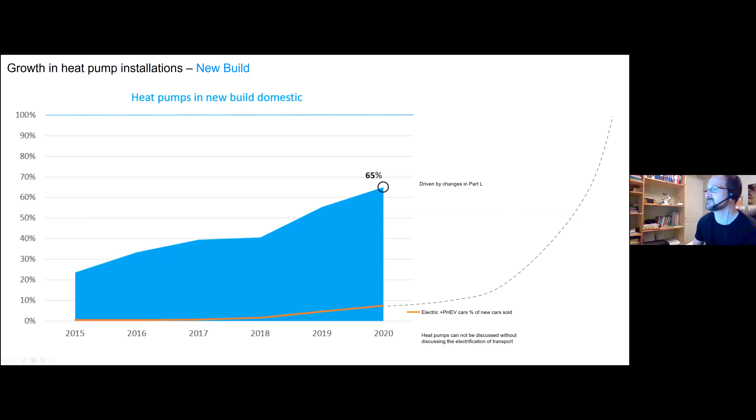So what about existing buildings? There's a relatively low growth in existing buildings so far, but the Climate Action Plan, which is recently released, aims to change all of that.

The Climate Action Plan has a target by 2030 to get 500,000 existing homes up to a B2 BER. That's about 25% of the current houses in Ireland. And 400,000 existing homes are to install heat pumps, which is a huge number - about 20% of existing homes to have heat pumps within the next 10 years. That's about 109 heat pumps a day that need to be installed.

It's a manageable number. Now the 400,000 can be a subset of the 500,000. So part of the upgrade could include a heat pump.

By 2030, the plan is to have 100% of new cars and vans as electric vehicles or plug-in hybrid. By my calculations, if we ramp up to 100% by 2030, that's about 18% of all cars. So 100% of new cars electric seems like a big figure, but in 10 years' time, you'll still only see 1 in 5 cars on the road being electric or plug-in hybrid. The Climate Action Plan works that out at about 25%, but I think they're assuming a more rapid growth earlier in the decade.

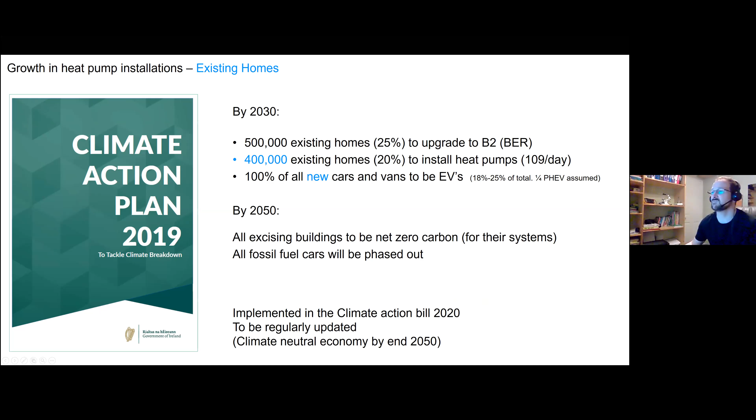So what about existing homes? Getting that 500,000 up to a B2. Now, if we take into account that over 40% of the housing stock in Ireland was constructed after 1997, it has a reasonable standard of insulation - well, some insulation. 1997 was the first serious building regulation, with U values of walls about 0.4, that sort of level.

If you take a 1997 dwelling, it will achieve roughly a C1 if you work out a BER rating. If you just add a heat pump to it, it brings it up to a B1 or maybe even an A3 in some circumstances. So all we have to do is take those 500,000 houses and add a heat pump, and it achieves that first bit of the target.

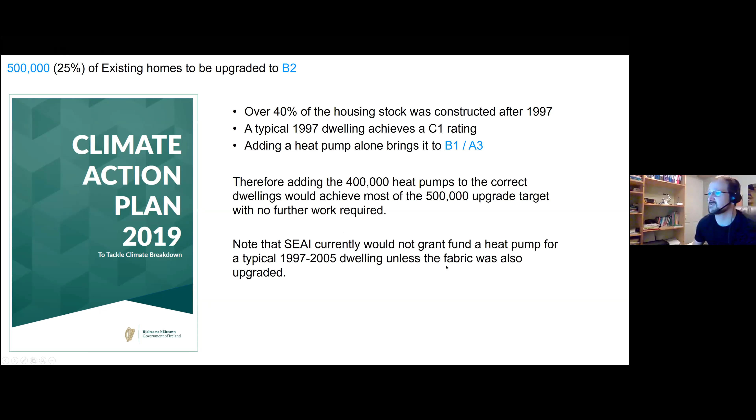Now, at the moment, SEAI won't give grant funding for a heat pump for a 1997 house unless you upgrade the insulation, at least to around the 2005 levels. Possibly that's a bad move if we want to get 400,000 heat pumps into existing houses. It may make more sense to put the money into the heat pumps rather than upgrading the dwelling. We'll get on to a bit more about that later in the presentation.

So what alternatives do we have to electric heat pumps? Why are they the chosen method of reducing the carbon of heating?

Well, we could use biomass, and biomass started off being reasonably popular once pellets started being produced. But biomass produces significant local emissions. In London, it's one of the main reasons why the levels of particulates and carbon monoxide are so high. There's also transport emissions associated with getting the fuel to the buildings, and fuel delivery is awkward, having to wait and organize fuel deliveries. So it's not necessarily ideal, particularly for buildings in built up areas, in cities. In Dublin, the particulates and NOx emissions are already above WHO limits.

Biofuel, bioethanol, elements like that - it creates local emissions and transport emissions, same as biomass. It's also quite expensive, and it's quite difficult to get your hands on it. Some companies like Tesco have done deals to secure a supply, but for the average person or average client, trying to get hold of biofuel is quite difficult. There's also some ethical concerns about it, replacing the planting of food with the planting of fuel, which can reduce the availability of food to the most vulnerable.

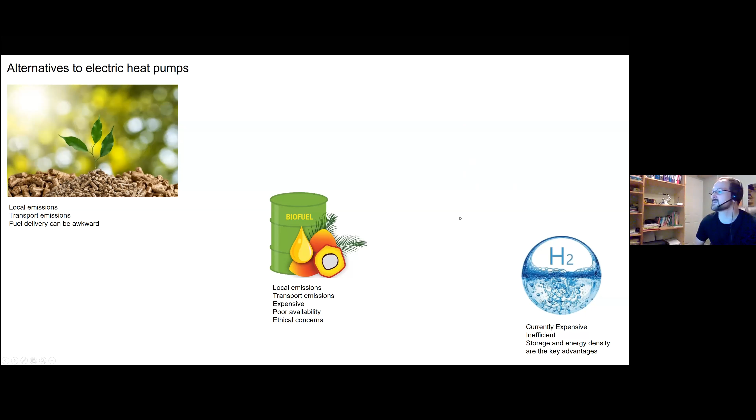However, the main interest in it is the storage potential. Unlike the wind, we can store it. And the energy density is very high, which makes it excellent for transport. So it's not going away.

Well, what about alternatives using natural gas? Natural gas isn't a zero carbon fuel, but how good can we get with it?

Gas engine CHPs, if we were to burn it in an engine, generate electricity, take the heat out, the overall CO2 emissions are actually worse than using a natural gas boiler and electricity from the grid. And of course, it creates local emissions with particulates and NOx emissions. A lot of literature will still refer to CHP as being a low carbon technology. Even if we look at the EirGrid's generation capacity statement that was released in August this year, it states that CHP reduces CO2. The maths isn't difficult to do, and if you do the maths, it doesn't reduce CO2 compared to just using a gas boiler and electricity.

Then we get on to fuel cell CHP, which has only recently become commercially available in Ireland. This is really an advanced version of a CHP unit. It's a CHP done properly. The natural gas is converted directly into electricity and heat without any moving parts. It's just chemically converted.

This process gives out about 18% less carbon dioxide than an electric heat pump when you compare it with the grid carbon intensity of electricity at the moment. So it's better, even better than a heat pump at the moment, but only for the energy produced.

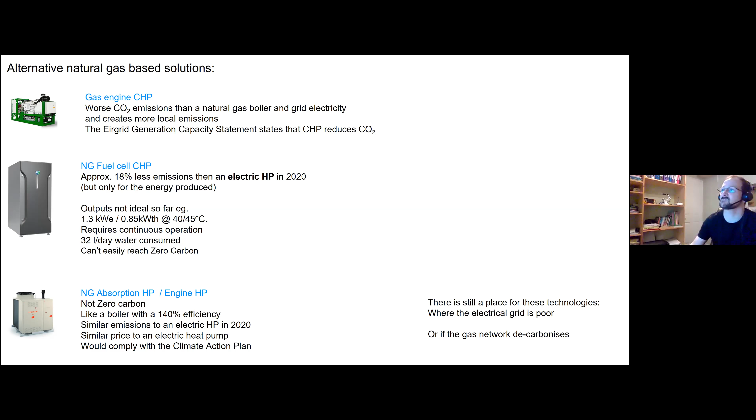They may also start to come back into popularity if the natural gas grid decarbonizes. And decarbonizing the natural gas grid is clearly something gas networks Ireland are interested in because they run the grid and that's their livelihood. Ireland has a very well-developed natural gas grid, so it would be a shame to let all that infrastructure go to waste. And there is a plan for getting the grid down to zero carbon by 2050.

So you could ask the question: does it make sense to retrofit expensive electric heat pumps when natural gas is going to decarbonize, and we can reach this zero carbon target just by holding on until the natural gas decarbonizes? The difficulty with that is that the plan is to have it decarbonized by 2050, and the plan involves having about 37% of the natural gas provided by biomethane. That's organic waste being converted into methane, which is effectively net zero carbon. About 13% hydrogen, which is useful for storing renewable energy in particular. The bit I have a difficulty with is the 50% is solved by using carbon capture and storage.

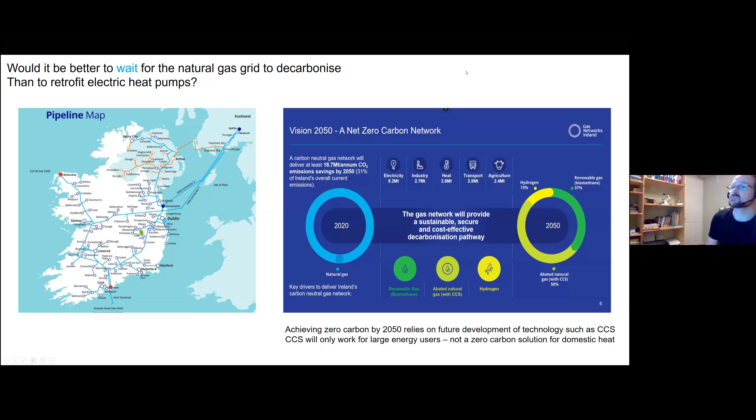So you burn the fuel, you capture the carbon, and then you bury it in the ground. That technology is expensive and is somewhat at the early stages of development. The other difficulty is it works well, or could potentially work well, for electricity generation or very large energy users, but in a domestic house it's not going to work. We can't capture the carbon at a local boiler. So for domestic users, this solution has a low probability of getting us to absolute zero carbon.

And how is decarbonizing going with the electrical grid, on the other hand? Back in around 2005, the carbon intensity of the grid was about 635 grams per kilowatt hour, and it has reduced dramatically since then, right down to about 375. The intention is eventually to go to zero by 2050.

And how realistic is that? Well, you can see that a significant proportion of the load is made up by coal and peat, and there is an active plan to phase out coal and peat by 2025, which will leave us dropping down further. Part of that will have to be made up by natural gas and part by renewables, but the figure is guaranteed to reduce. If we compare it to natural gas, that has stayed more or less steady so far.

If we look at heat pumps, even an air source heat pump used to produce domestic hot water, so water for washing at 60 degrees, it was better than a natural gas boiler from about 2016 on. And air source heat pumps for heating, from about 2008 on. You can see why 15 years ago it didn't make a lot of sense to fit heat pumps, because the carbon impact was actually larger than using a gas boiler. But right now, using a heat pump is about twice as good in terms of carbon emissions as a gas boiler. So changing to heat pumps now gives a certainty of improvements straight away.

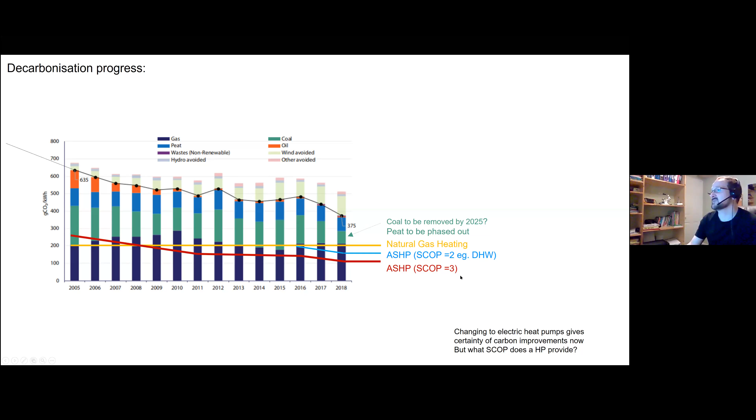So what sort of efficiencies can we get from a heat pump? If we look at the marketing of heat pumps, we get all sorts of claims. The claims have been more carefully worded in recent years. I've seen many a claim years ago of manufacturers saying you put in 1 kilowatt of electricity and you get 5 or even 6 kilowatts out. More recently, manufacturers have become more careful about how they word the claims. So here's a couple I pulled off the internet this week.

Two thirds of the usable heat comes from a free and sustainable source. Well, that could be true, I think it's a COP of about 3. That seems reasonable. Next one says up to 75%, so that would infer a COP of 4. However, they've used the word 'up to', which means it's not particularly claiming anything definitive. The next one says between 2 and 4, but in new systems can be 5, using the word 'can be' to qualify that. So they're saying somewhere between 2 and 5.

It's not really committing to anything in particular. Another one says up to 5 times the electricity, so a COP of 5 is claimed directly, although it says 'up to'. What they mean by up to is that under certain weather conditions you get a figure of 5, which isn't really that useful as a metric. You want to know how it performs over the whole year.

So if we go to SEAI instead, as an independent body, and ask what do heat pumps do, their website will say between 3 and 4. So they're giving a fairly safe range.

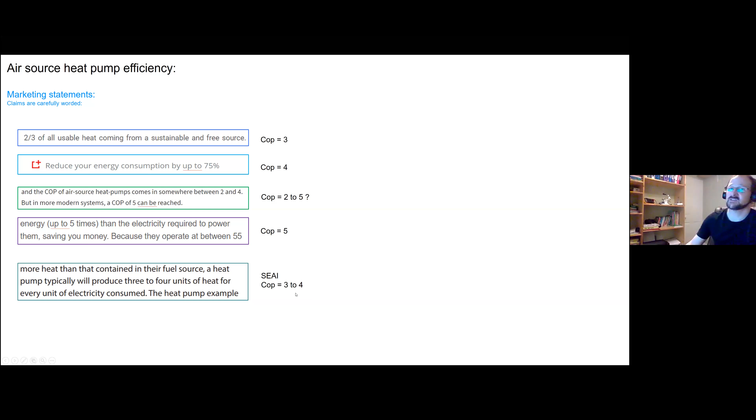There's very few studies that have monitored the actual performance of heat pumps in domestic settings seasonally, and there's two that are almost always referred to. First is the Energy Saving Trust study, where they took 80 heat pumps and monitored the performance of them. The manufacturers were aware that they were being studied, so they were able to put their best foot forward. This is the distribution of seasonal COPs.

This is a subset. After the initial test was done, the manufacturers were given the opportunity to go back and tweak the units, and then they were remeasured again. You can see none of the units achieved a figure of 3, and they're getting around 2.2. But that was back in 2012, and there's been some improvements since then. UCL did a second study in 2017 with about 700 dwellings, and they're getting a median of about 2.65 for air source and about 2.81 for ground source.

One of the interesting things is they're not really getting much of a difference in performance between air and ground source, although it's traditionally always stated that ground source gives you much better efficiency. From the monitoring systems, it doesn't seem to be true. So even these figures are much lower than that figure of 3 I was using earlier. But that's 2017 data, and products have improved a little since then. I think if you see claims of over 400% efficiency, you need to start treating them with suspicion.

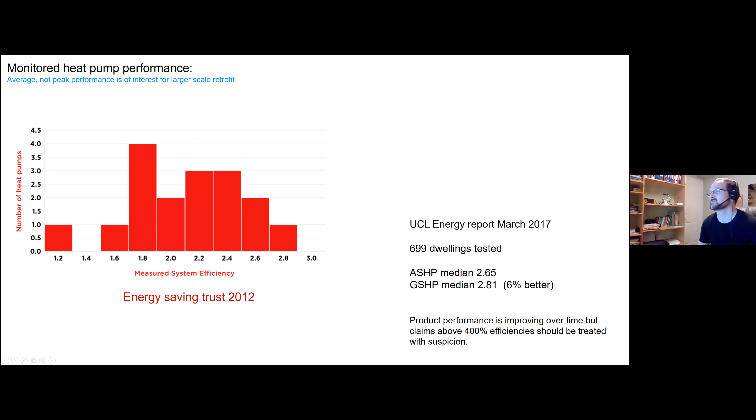The other difficulty with ground source is if it's poorly designed, it can be less efficient. I've seen a lot of ground source systems that have been undersized, and to compensate for that, the temperature is lowered. So where in an air source system, if it was 7 degrees outside, you're working with 7 degrees, with a ground source system, quite often the flow would be at -6, -8 even. That graph assumes there's a 20% difference in performance, whereas there was 6% in the monitored performance.

Here's an interesting one: the more efficient we make a building, the less efficient the heat pump becomes. So if you think of a new, very efficient fabric for a building, well built, well insulated, airtight, with heat recovery ventilation, the amount of energy used is a lot smaller, but the efficiency of the heat pump is worse. That's because the external temperatures are lower when the heat pump is required.

When it's warmer, you don't need to turn the heat pump on. So if you take a new dwelling, say below 10 degrees you need to turn the heat pump on, above 10 degrees you don't. That gives you an average temperature of about 6 degrees. In an older dwelling, anything up to 15 degrees, you need to turn your heat pump on, and the average is about 8.5. So there's a difference in temperature.

Also, the newer building will spend more of its time in defrost cycles, which accelerates the drop in efficiency.

The other factor is that a large proportion of the energy is domestic hot water, which has to be generated at 60 degrees, where the heating might be generated at 40 degrees. So that reduces the efficiency of the heat pump. In a well-insulated dwelling, the flow temperature can be reduced, but not for the domestic hot water, so the net effect is that it's less efficient.

What this is getting towards is that retrofitting heat pumps is more efficient than installing them in new dwellings, because the energy usage is larger, so you're saving more, there's more energy to save, and the heat pump efficiency is better. So if you had a fixed amount of money to spend on heat pumps and could install them in newer buildings or older buildings, you'd get a better carbon saving by installing them in the older buildings.

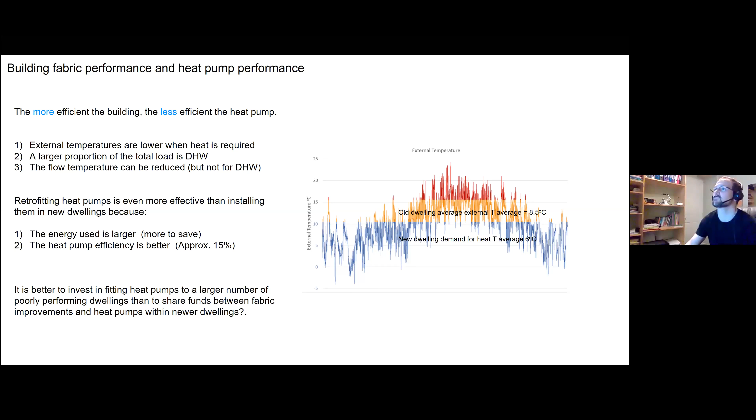This is really questioning the fabric-first mantra that is the staple of sustainable design. Another part of this question is: is it carbon and cost optimal to improve insulation in buildings if the gas and electrical grids are approaching zero carbon by 2050?

There's a carbon cost in making insulation, known as embodied energy - the energy it takes to make the insulation materials. If you take an extreme scenario like 2050, every bit of insulation you add to the building increases the carbon used, because there's no energy used in heating, but there is carbon used in producing insulation. But if we look at the current scenario instead...

I've done a graph here with the U value on the bottom, comparing mineral wool insulation and PIR insulation, which is high density insulation, against the total lifetime carbon emissions. This takes into account the embodied energy of the insulation and the heat that escapes through opaque elements - walls, roof and floor.

So when you improve the insulation value beyond 0.2, you actually increase the carbon used. By adding insulation, you're increasing the overall lifetime carbon emissions of the building. It's even more dramatic if you're using PIR, because the energy used to make PIR is considerably more than the energy used to make mineral wool. This chart takes into account the difference in density of the two materials, for an equal U value.

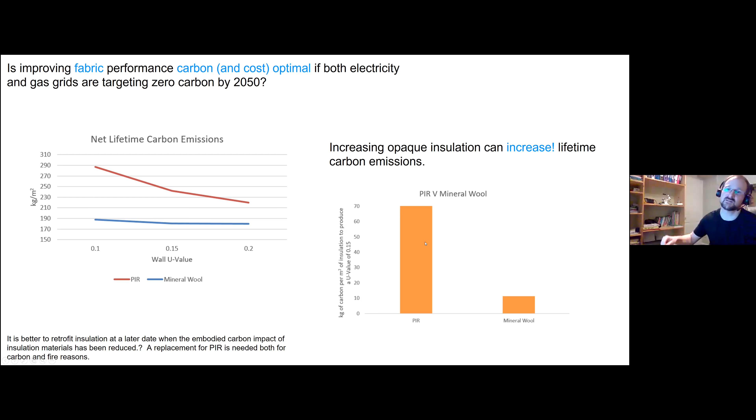So there is also an argument to be made that it may be better to retrofit insulation at a later date - to install heat pumps now and come back to install insulation later, if a better form of insulation is produced with less embodied energy. We need a replacement for PIR anyway, because there are significant fire issues with PIR in facades. There may be an alternative produced with low embodied carbon, and the carbon used to produce insulation is also reducing as the grid intensity reduces.

Even looking at the 2019 Part L, that has a U value of 0.18 for walls - that's already less than carbon optimal. So at the moment, building to the building regulations uses more carbon than if we didn't build to them. This effect increases as we approach 2050: as the carbon impact of the heating systems reduces, the effect of the materials we use increases.

Now that argument is also relevant to what you build a building out of, and concrete usage and other materials as well, but purely in terms of insulation...

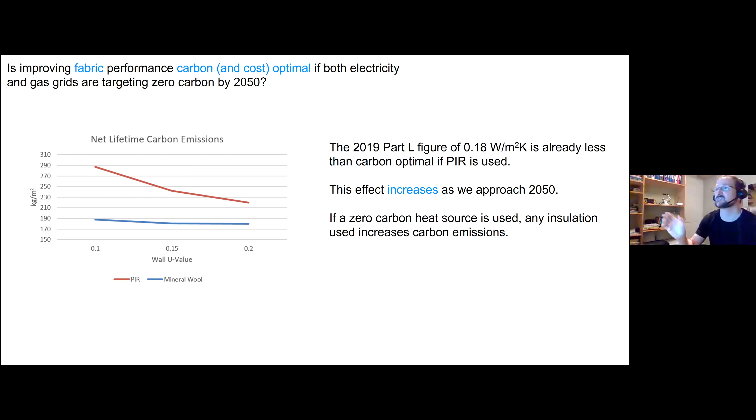So what approach should we take to retrofitting? Well, if we improve the thermal performance of the worst housing stock and prioritize in particular the pre-1997 stock - that's about 60% of the housing stock - before adding insulation to dwellings that are partly insulated.

So rather than offering grant funding for insulation for anybody who wants it, it would be better to offer it to those with the worst performing buildings and concentrate the money on those. That's where the biggest savings are to be made. Minimize grants to homes that are reasonably well insulated.

Concentrate funds on retrofitting heat pumps into dwellings that have a poor insulation level, but not too poor. I'm saying not too poor because if you put a heat pump in a very old building, it will find it difficult to heat the building because the temperatures are lower. But certainly 1997 level buildings are better to fit heat pumps into than 2005 dwellings.

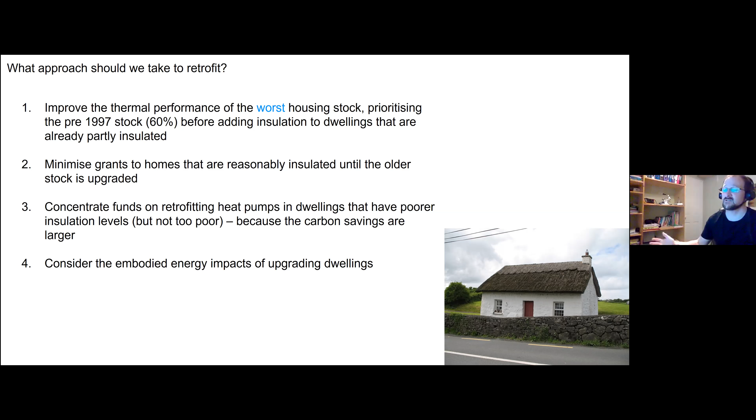And we need to start considering the embodied energy impacts of materials in buildings. Historically, it hasn't been that big an issue because the amount of carbon used by the energy use of the building was such a large factor. Now that that's reduced, the embodied energy becomes more important.

Another question we wanted to address was, can the electrical grid actually support this growth in electric heat pumps - both the new heat pumps and the older heat pumps, the retrofits? So we need to look at the generation capacity. Can we create enough electricity, and can we distribute it to where it needs to get to? And then is there enough endpoint capacity in the actual homes to use it? So we look at those questions.

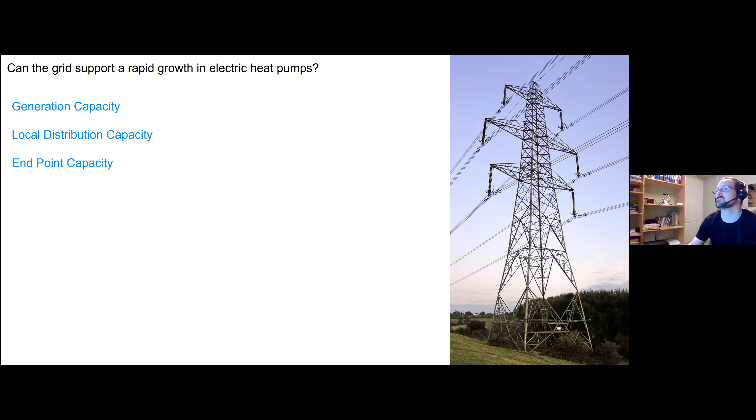What's the context of that generation capacity? Well, the targets for retrofitting heat pumps will mean that there'll be about 1.3 gigawatt of electricity required for retrofitting, and about 1 gigawatt for new build, by 2030. Now, the max demand on the grid to date has been 6.7 gigawatt, and the generation capacity is about 10 gigawatt, but that doesn't mean 10 gigawatt is available - there has to be a certain reserve capacity, and there's always some plant out of use.

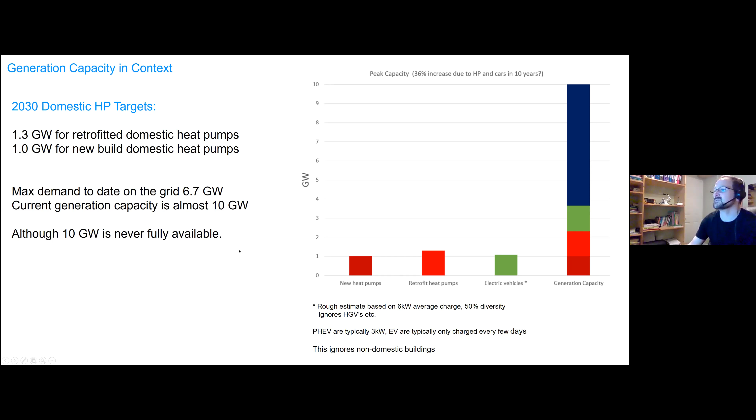So if we graph it - if we put in new heat pumps, retrofit heat pumps, and electric vehicles - it's about 30% of the existing capacity. That does ignore non-domestic buildings and the electrification of heat in those.

So is there a plan for this? Well, the plan is in the All-Island Generation Capacity Statement, which has just been released, or updated this year, in August 2020.

Now, the main concern in that document seems to be data centers. The increase in demand for data centers is considerable and seems to be taking more priority than heat pumps. By 2030, 27% of all demand will be from data centers. I looked at the previous version of this report, and the figure was 31%. So the forecasts for data centers are reducing. I think that's mostly because data centers were overestimating what they need when they apply for electrical supplies.

This graph also shows the estimated energy usage, not the peak power usage, but the actual energy usage over time. The residential one seems to be almost flat up to 2029, so it doesn't look like the heat pumps have been included in this. The reason for that is this graph was copied from the previous version of the report - they appear to have forgotten to update it. In the previous version, they'd included new heat pumps but hadn't included retrofitting of heat pumps, and that's why it's more or less flat.

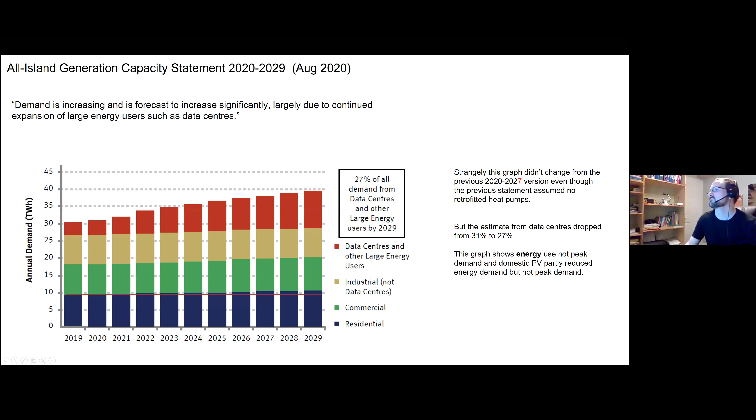So why were they thinking that? What can PV do to energy demand? Well, if we cover a full roof in PV, like the one in the image, then we can provide about twice the amount of energy that a heat pump requires. But it doesn't really help in terms of peak loads, because the peak load on the heat pump is first thing in the morning when there's no solar available.

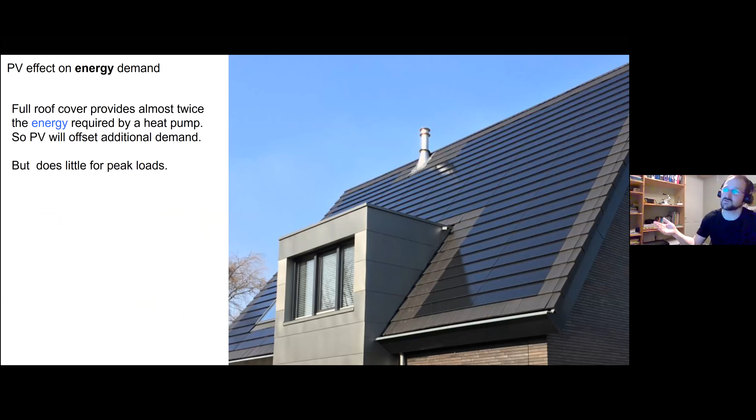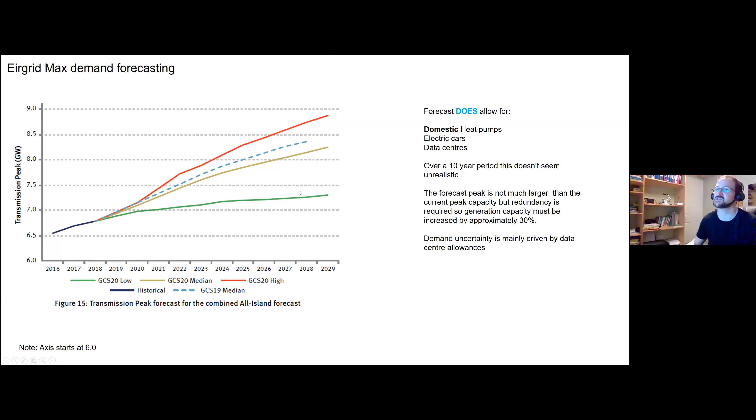The demand uncertainty between the different forecasts is really related to likely data center investment over time. I'll just point out that the axis starts at 6. I particularly dislike graphs that start halfway up the axis, because it gives the impression there's a much larger jump than there actually is. This is only 30% of the total.

So what about the predicted fuel mix? The total generation capacity available has to stay - for fossil fuels, it's staying more or less the same. This doesn't mean the utilization is the same. It'll be used a lot less, but particularly the gas will be sitting in standby while renewable energies kick in. By 2025, you can see the coal disappears and the peat disappears, and we're left really with gas.

By 2030, the aim is about 70% renewables in the generation, so a lot of this is standby. Then by 2050, presumably what happens is this gas is absorbed in carbon capture and storage, which then brings the electrical supply down to zero carbon.

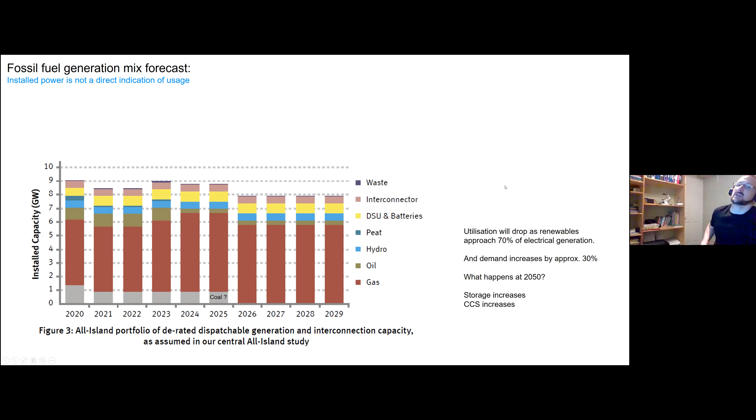Now, what about endpoint capacity? The endpoint capacity of a dwelling is 12 kVA, so you get a 12 kVA allowance. That's slightly under 12 kilowatts. The electrical engineers won't like me converting kVAs into kilowatts, but you get somewhere between 10 and 12 kilowatts from it, depending on the type of demand you have.

So a heat pump in a new building would be about 3 kilowatts. In a very old building, it would be about 5 kilowatt electrical input. That's the same as one kettle in the case of a new building and about two kettles in an old building. So it's not a huge demand for a heat pump - if you were to put a heat pump into an existing building, there really wouldn't be any issue with endpoint capacity.

The difficulty comes when you also add an electric car - this is why I said electric cars were important at the beginning. If you have a plug-in hybrid, typically they come with a 3 kilowatt connection, so adding 6 kilowatt to the demand, which is a typical demand for a building. If we add 6 kilowatt to the demand, we're still well below the 12, and there's no difficulty having a heat pump plus plug-in hybrid.

If you put in a full electric car, you may decide to put in a rapid or more rapid charger, the next level up for charging, which would more or less fill a 60 kilowatt hour battery overnight quite comfortably, on night rate electricity, is 7 kilowatts. That actually decreases slightly over the night because the battery can't maintain the full rate of charge. But if we were to add a 7 kilowatt electric car and a 5 kilowatt heat pump,

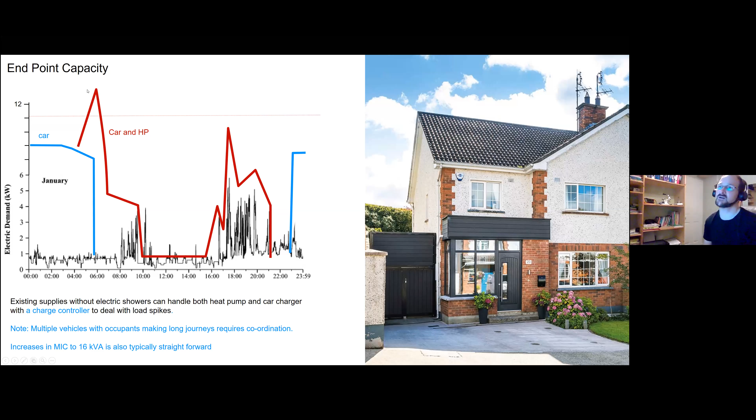So this is really the point at which we go over that 12. And if we have a demand controller on the car, it'll simply mean that the load pulls back further on the car. So the result may be that your car isn't completely fully charged. Now, most people will find they only have to charge the car maybe twice a week anyway, so it's not a big deal. It's only for those doing very long journeys. Say you were traveling 100 miles a day and needed to charge your car every night,

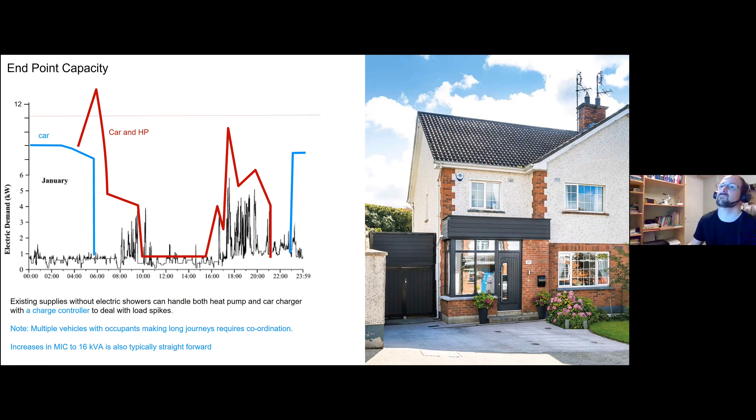you may find you get into a little bit of difficulty. Also, if you had multiple vehicles that you need to charge and you tried charging them both at once, you'd obviously run into problems. It is possible to increase your MIC to 16 kVA relatively easily. You just make an application to the ESB. There's a small charge for it. But in most properties that would be possible. Your typical house won't need to do that by adding a heat pump and a typical electric car.

What about the distribution capacity? I've spoken to the ESB networks about their approach to developing the network for heat pumps and electrification of transport. The electrification of transport is probably more of a concern than the heat pumps. And the after diversity maximum demand is already adjusted for new housing estates, so this is already taken into account for any new developments to the network. They are allowing for the infrastructure for it.

In existing estates, a gradual increase in demand is catered for. There shouldn't be any difficulty in most estates. What could cause difficulty is in particularly some of the older estates, if everything was changed at once. So if there was a scheme where everybody in the estate was to get a heat pump, that would clearly have to be coordinated with the ESB networks to upgrade the local infrastructure to deal with it. A gradual adoption of transport is likely to stop those step changes as heat pumps or cars are adopted over the next 10 years.

Now that may mean that a coordinated approach to retrofit may be better than simply providing grants and leaving the market to its own devices. It may be better to find an old estate, like a 1970s estate, and try to retrofit or make an offer to retrofit heat pumps to a large group of houses together, and then the ESB could be consulted on upgrading the infrastructure at the same time. That would also provide efficiencies in terms of installing. You'd be able to get a much better deal for installing heat pumps as well.

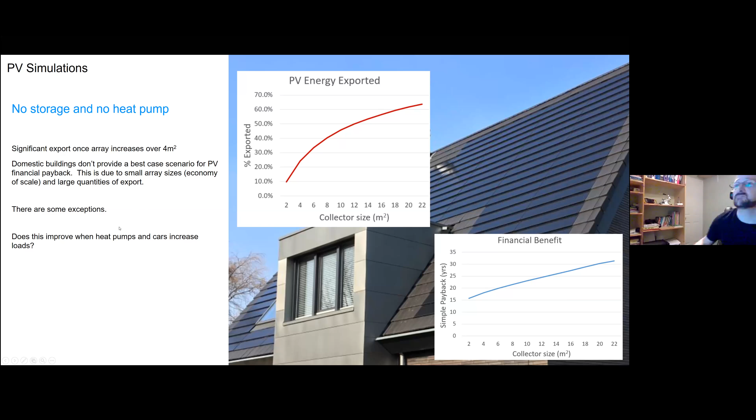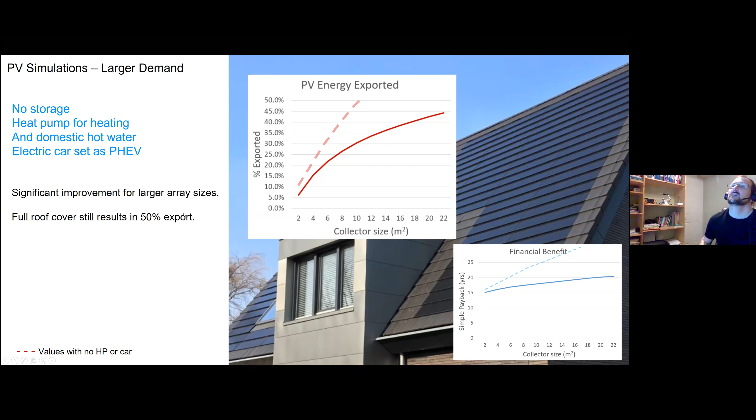This is because current battery technology only has a certain number of charge cycles before the storage capacity drops. However, costs of batteries are falling dramatically, and the battery degradation is improving considerably, so this payback is about to start becoming beneficial for batteries.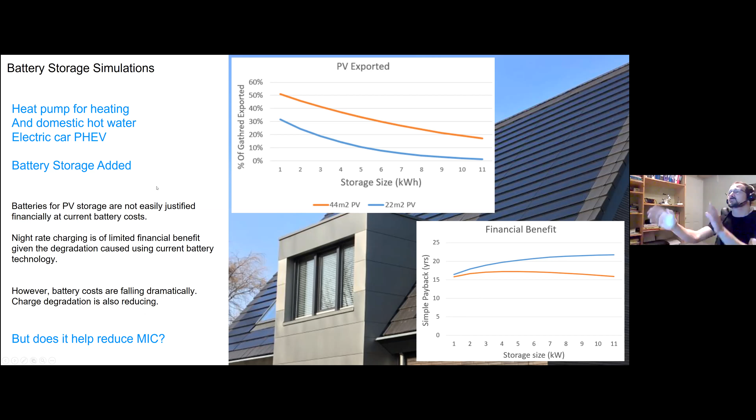So that's in terms of energy, but how does it help the MIC? Well, the max demand tends to occur only in that short period in the early morning when we have the car and the heat pump running together, and the crossover is about 6 kilowatt hours. So a 6 kilowatt hour battery would cover that crossover.

That would avoid the need for a demand controller and could take up that difference, but would also mean you can get a complete charge on your car even if you're driving a long distance. So I think the battery can improve rapid charge convenience, and that may be the main motivation for getting it, that you can charge your car a lot more reliably than trying to store solar energy or other elements.

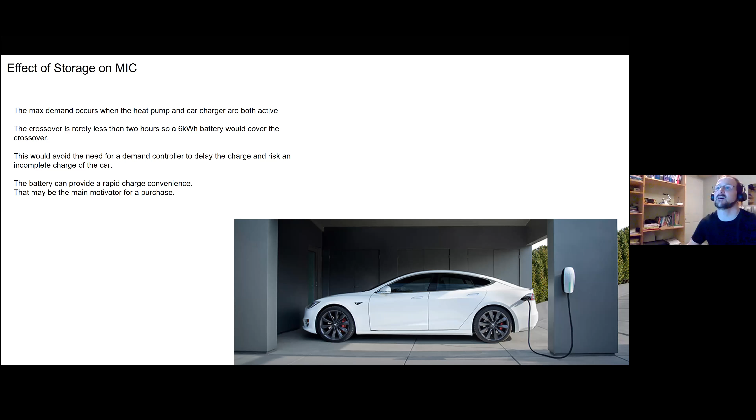There are plans in the Climate Action Plan to pay for export to the grid from PV, which will improve the cost of PV, but it reduces the chance that you'll purchase a battery.

So what about the costs of heat pumps? One option for an existing building is to use a high temperature heat pump. If we were to put in, say, a 16 kilowatt air source heat pump capable of delivering 70-degree water - heat pumps are best if they're delivering water about 40-45 degrees, but it's possible to get them to deliver high temperature water. You can use 2 heat pumps in series as a cascade, or you can use a high temperature heat pump.

Even if we're delivering at 70 degrees, we can put on a weather compensator so it's operating more efficiently for a large proportion of the year. The supply cost of this is 7,000 at the moment, ex-VAT, so it's quite expensive.

By the time we've actually installed it, paid for the labor, alterations to the system, it's about 10,000 including VAT. And then we can take out about 2,500 for a replacement boiler, because in an old building you'd probably be replacing the boiler anyway. That brings the cost down to about 7,500.

There's no real payback in that method, so the payback is more than the lifetime of the system, assuming no grant funding towards it.

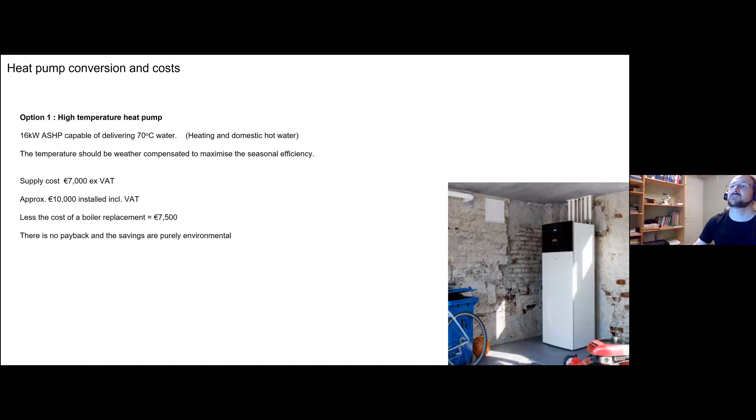The alternative is to add low temperature heaters, so we can maintain that 40-degree water temperature and get the heat pump working much more efficiently. You could use something like a convector, a fan boost radiator. So you can replace your existing radiator and wire it up. There's a series of little fans, almost like little computer cooling fans, above a finned convector, and that allows you to use water temperatures around 40 degrees in an existing building.

Or with the current grant, at the moment you get a grant of 3,500, which will bring that down to 21 years. But it's still above the lifetime of the unit, so it's difficult to persuade 400,000 houses to put in heat pumps with the current grant. I think you'd almost need double the grants available to persuade people to do it. The cost of doing that would be about 2 billion for that 400,000 replacements.

There's also penalty options. We could look at setting minimum standards for rental properties. There's about 500,000 houses rented in Ireland. If we were to say, well, you can't rent your house unless you've got a B1 rating, and one way of doing that is getting your heat pump, and we'll give you a grant towards your heat pump, it may be a solution to get that done quite quickly. Probably not fair on the people that rent houses, but it is a solution.

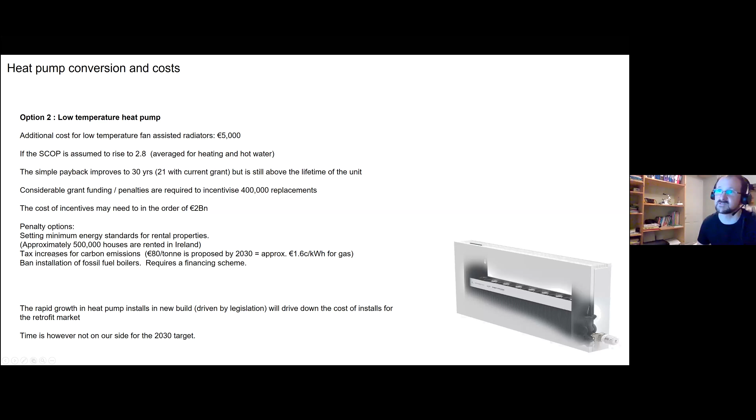We could prevent that with legislation and just say you're not allowed to use heat pumps for cooling, but that's not happening at the moment. Other technical issues: if you have several electric cars, that could become problematic. Probably won't be a problem coming up to 2030 because there won't be many people with 2 electric cars. 70% of cars will still be on fossil fuels at that point.

Common faults with heat pumps, getting close to the end of the presentation.

Owner misunderstandings, misleading advice from suppliers about efficiencies, we've talked about that. Misunderstanding about how underfloor heating works in low demand buildings.

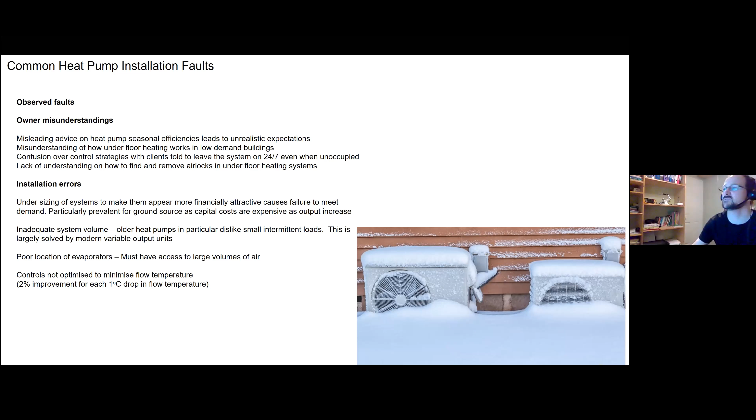Controls also are often not optimized. There's a 2% improvement for every 1 degree change in flow temperature. So if you put in a weather compensator that says it's a warm day today, reduce the temperature of the water, that'll dramatically improve the efficiency of the heat pump. So I don't think heat pumps are designed or controlled to be as efficient as they could be.

So to conclude, to give you guys a chance to talk: rapid growth in electric heat pumps is an essential part of the solution to decarbonize heat. The question isn't can it happen or when will it happen - it is happening, and it's happening now. Heat pumps are rapidly growing despite the cost, particularly in new buildings, not so much in existing buildings, but it's about to kick off in existing buildings.

Challenges produced by increasing electrical demand can be met and have been planned for. All of those involved in the electrical grid are planning for it and understand it. So the challenge will be met. There may be some instances where you can't put heat pumps in, or you can't put in a large number of heat pumps in a particular area over a short time period, but it can be dealt with.

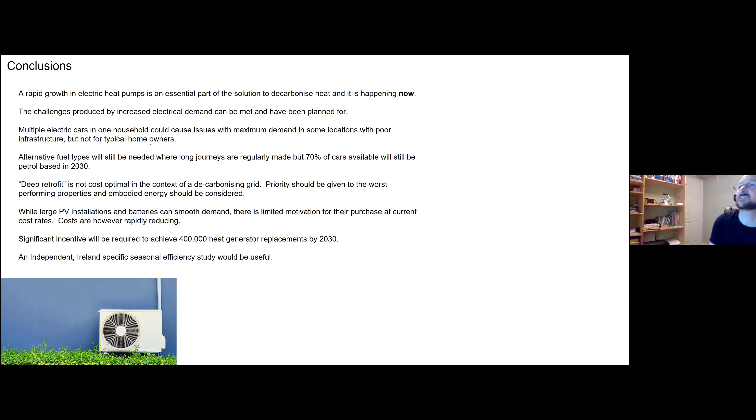Multiple electric cars in one household will be an issue with the infrastructure, but probably not until after 2030. You'll still need alternatives for long journeys, but remember, by 2030, 70% of cars will still be petrol-based. Plug-in hybrids are a great solution as well - you can make your local journeys on electric and your long journeys on fossil fuel. Not after 2050, but it'll drag things out.

Deep retrofit is not cost optimal in the context of decarbonizing the grid. So deep retrofit used to be the mantra, but keep in mind it may not actually produce the best carbon performance. Priority, in my opinion anyway, should be given to improving the worst performing properties, because that's where the largest savings can be made initially.

While PV and batteries can smooth demand, there's limited motivation at current cost rates. Costs are, however, rapidly reducing both for PV and batteries. Battery costs for homes will reduce dramatically as second-hand batteries become available from the electric car market, which will rise exponentially over the next 10 years.

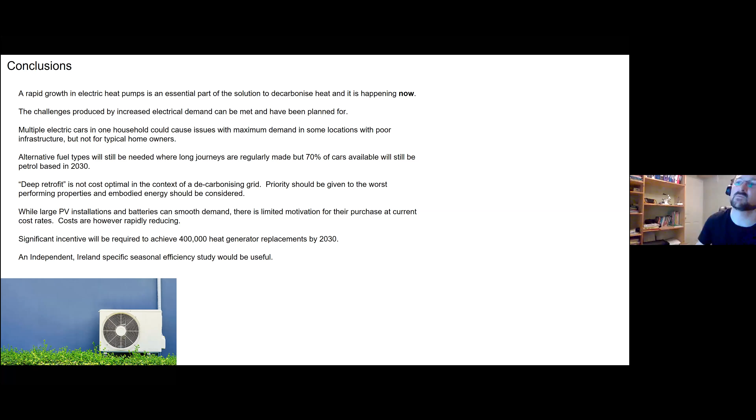I think we also need an independent, Ireland-specific seasonal efficiency study on domestic heat pumps. Even worldwide, we more or less only have two studies of how heat pumps perform in real life. It would be well worth it, if we're intending to put in 400,000 heat pumps, to know exactly how they perform, and also how their performance can be improved through controls - which units perform well, which ones don't. So that brings us to open discussion time.